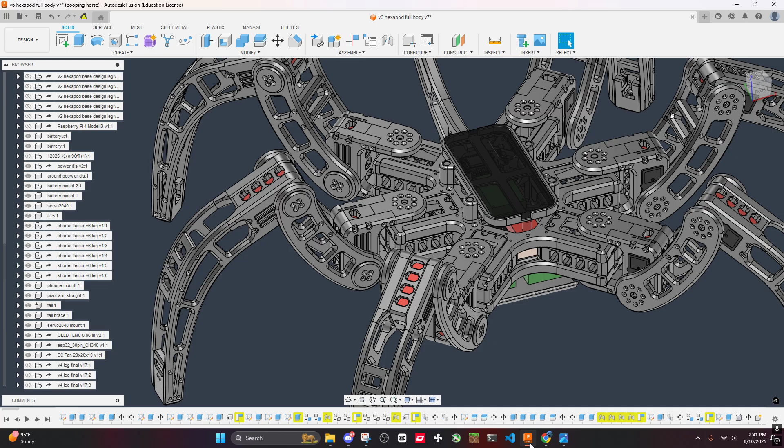So now I can get the pose and I can set the pose as a list of doubles, which means instead of putting this in here, I can make nodes that do things and then send them to Crab, and the Crab will follow that animation. And then I just snap in the one that I want. Or like I said, do the blending mode. Now that I have set pose, I can set pose and build, just give this 18 numbers right here, and it will snap the whole Crab.

The other way is to hard code the motion of each joint, doing this kind of thing. Mhm. But let's see here. For example, let's give this a shot. Standing radius. I don't have it open. You can go away, and you can go away. I need the distance. What radius do you want for the feet when they touch the floor when they go to stand up? What radius? What do you mean?

Okay, I'll try this another way. Like from the center of the body? Add my crab, and let's say that when it stands up, this is where the toes touch the ground. They just got to touch the floor right here. Okay. So what is the distance from here to here? Oh, I see. As if both circles are centered at the origin of the robot. Okay, so from the center, how far are the feet out?

From here to here is the coxa distance, and from this to this toe is what we want to know. Right. Okay. But I have this as a pose, and I have this as a pose, so I can do that mathematically. Yeah, you could just measure the distance somehow, the first time it happens.

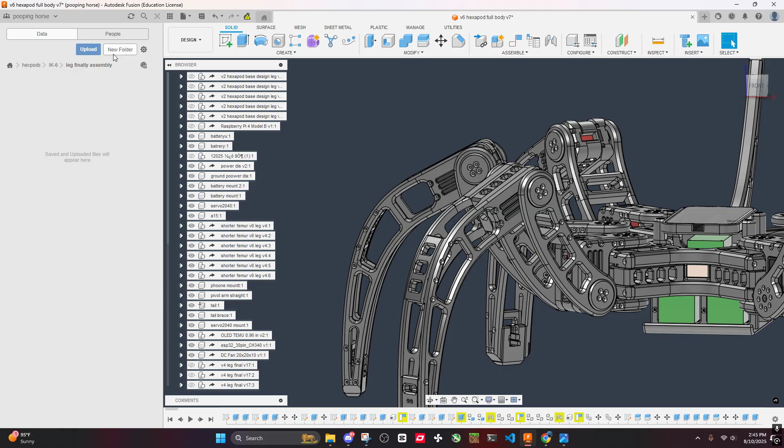So, I definitely need to work on a final assembly of the leg. Leg final assembly will create a new body, new design. We are going to save this as leg final design. He said it's not good to do a final design because it's better to number them, which is good advice. Leg, let's do V7, right? Because we're on V6 now.

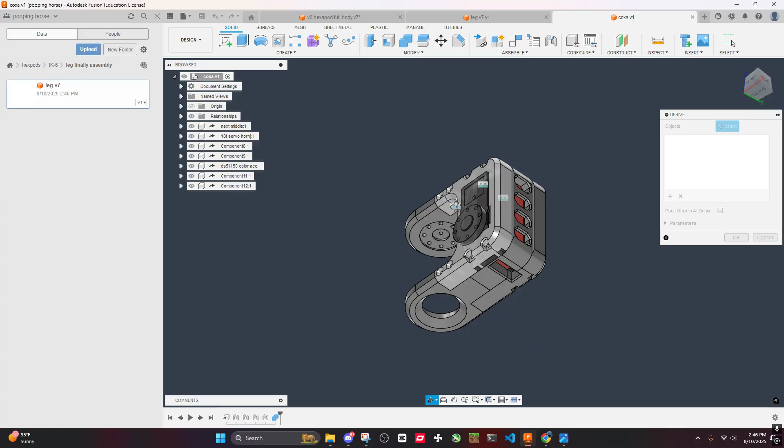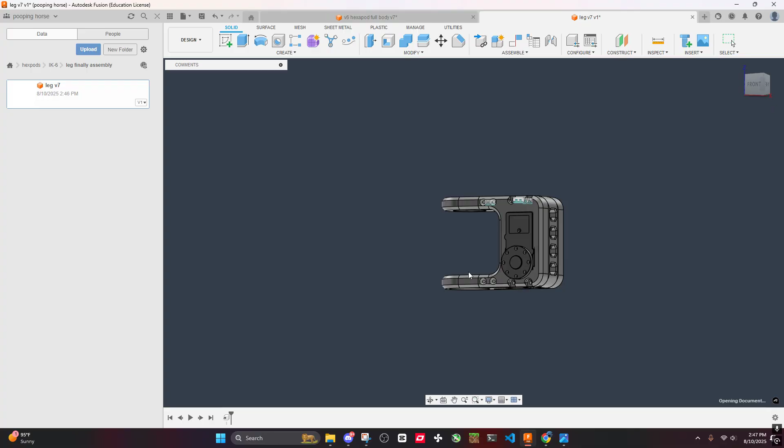We're on V7. We can do insert. Let's see. Inverse kinematics. Simulation. Okay, let's see. How do we want to do this? The coxa. And then we can do insert V4 leg final. We can just import the tibia, I believe. Can we do that? We should be able to.

If I click everything here, it's back. Okay. So I have to think a second. I've done this before, and I wonder if I have old code for this. I do. Sit down, stand up.

Put foot down would get the last point of contact on the floor, and then get the target position based on that initial starting spot. So it would set the end effector target position, and then the leg system is what would actually calculate, move all the bone parts.

Oh, so that's like inverse kinematics, right? Right. I had a separate inverse kinematic controller, and this thing is just saying move the toe to this point, and then the toe, P2, is following this path over time. Are you trying to find those equations that's able to do that? Put foot down snaps the toe to the floor, and then that sends the joint angles through to the crab.

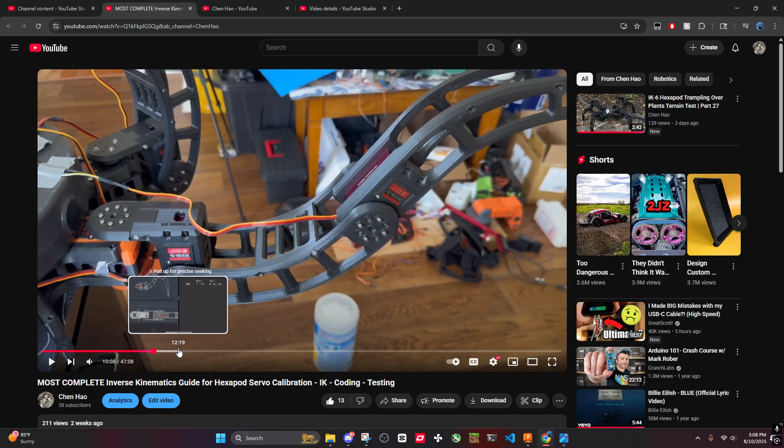Okay. If you, this is the zero. Okay, so for the coxa, I set the straight, it being straight out, just being 90 degrees. So it has 90 degrees to the left and 90 degrees to the right for the coxa. And I sent you the femur and tibia. What? I mean, I see the picture you shared, and I see the code. I'm not following the rest just yet.

Okay, do you see the tibia? If you take the tibia and make it straight with the body, like I think that's how it is right now. Wait, no, it's not. If you make it straight with the body, that's how I have the 0 degree for my servo. Okay. That's that. I can't do anything with that information at this time. Okay. So I do think that's useful. It's too soon for me.

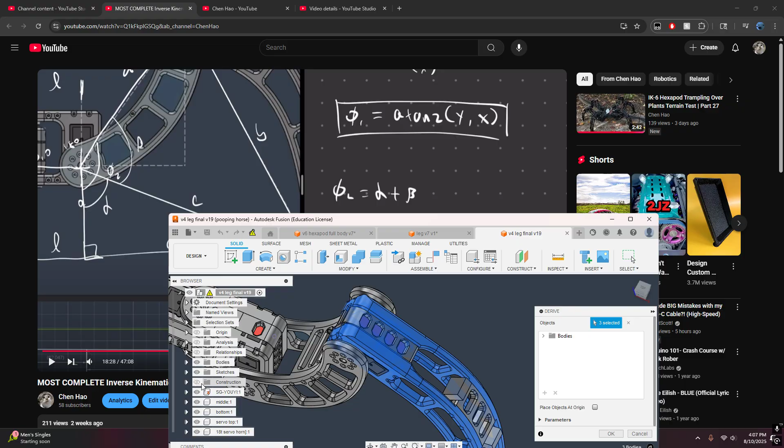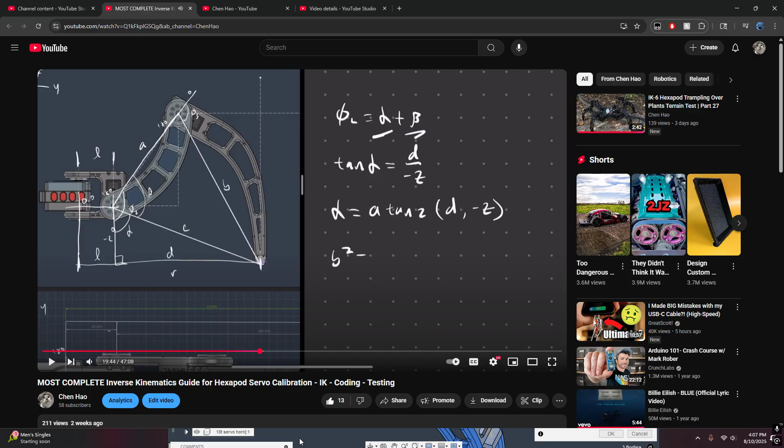So I'm just talking about from the hip joint to the toe tip. But make sure it's the horizontal distance. Yes, horizontal, and then R is the total distance. Linear distance. Yeah, the horizontal distance from the coxa to the tip of the foot. You subtract the coxa, so you're compensating for it. Wait, I have a drawing here. This is to crab center, and this is the radius of the interior.

What is the cursive L in the bottom left? That's the coxa offset or the coxa length. But the coxa length isn't the same for all six legs because the body isn't a circle. It's different for each leg. I have my origin set at these. You see my origin? It's the leftmost. I put a 0, 0 right next to the origin. Yes, I see that. That's fine.

So this is the horizontal distance from the toe tip to the axis of the coxa. It would be the femur? It would be the axis of the femur motor, right? In my drawing, that's how I had it. Femur's the red thing on the left, coxa's the bit in the middle. No, coxa is the red thing on the left. So it's coxa, femur, tibia. The coxa motor is attached to the body and it rotates.

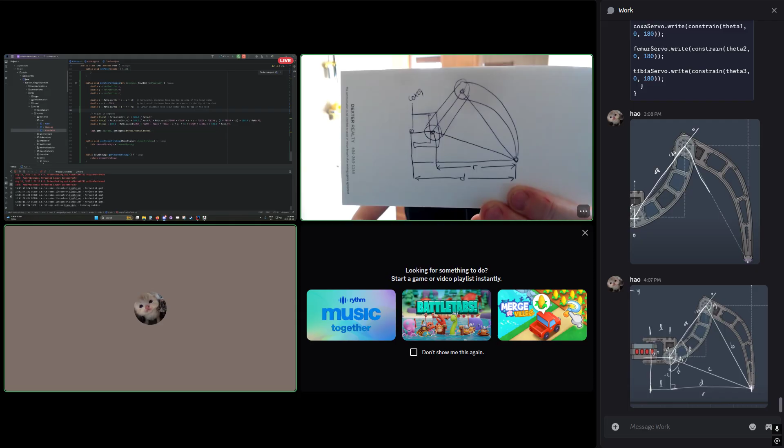Like yay. Let me see. Yes, yes, yes. Take a screenshot. One second. F12. Okay, I got it. Cool. So just D and R switched. That's it.

Right. Now, what are you calling the line from the right angle? You got edge C and you got edge R. What's the third side of the triangle called? It looks like it says C minus R. Oh, that's a negative Z, because Z is up and this is down, so that'd be negative Z. No, we're not putting negatives in here yet. We're just putting labels. That's C. That's a right angle. That's length B.

Wait, I think your stream is frozen, maybe? I'm not doing anything there. Oh, okay. I'm writing on a notepad in front of me. Old school style. This is A. Okay.

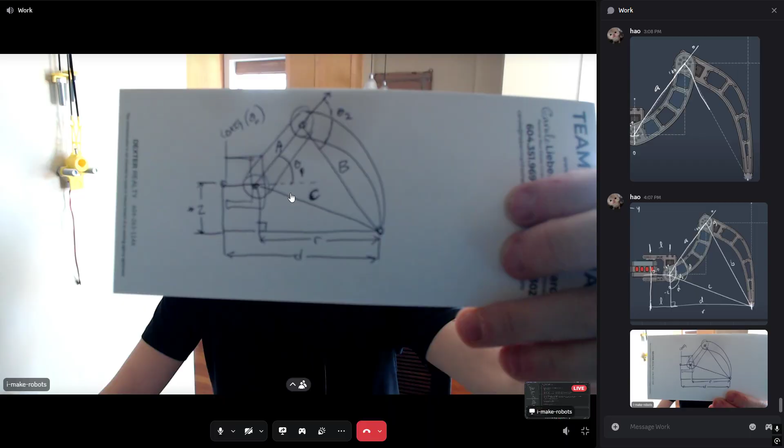The angle at the shoulder. This is the angle that we want. Theta. Theta zero. No, it's theta one because theta zero is coxa. And this angle, this is theta 2. So, like this. Let me see. Okay, Z, C, B. Wait a second, I'll just take a picture with my phone. Rotated it. Put it in general. Okay, let me take a look. Sorry, it's rotated.

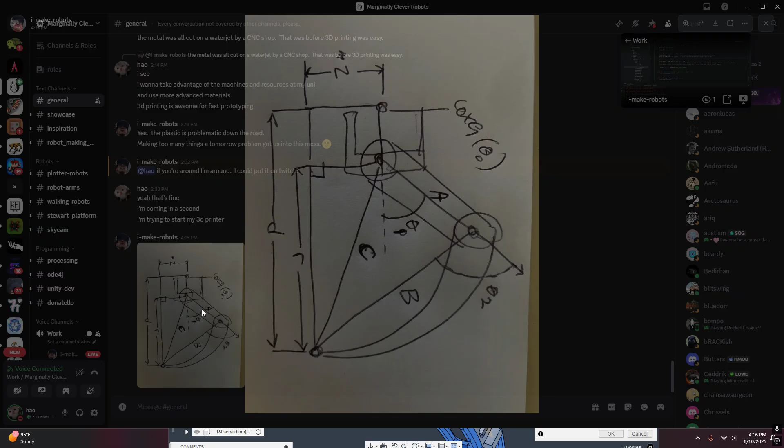Okay, theta. Wait. Coxa, you're calling that theta 0 and then theta 1 and theta 2, right? Yeah. Theta 1 doesn't look right. Oh yeah, theta 1's wrong, because you have your zero angle pointing straight down and you're going from the horizontal, I think. Yeah, you're right. Oh, it was so close. Try that again. A, B, C, theta 2, theta 1.

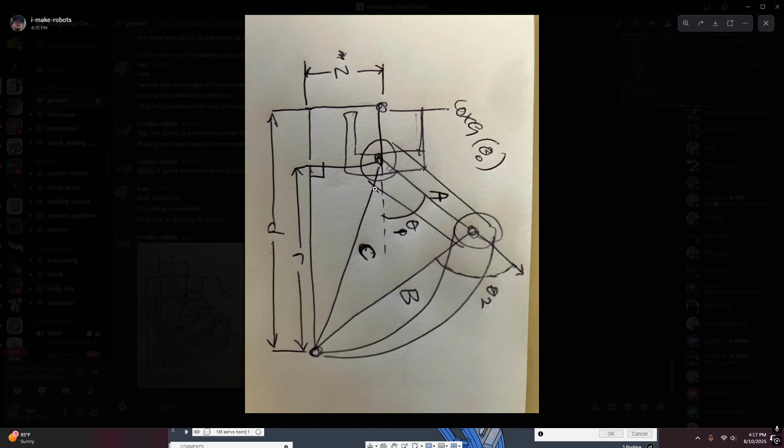Uh-huh. And to calculate theta 1, the femur joint, I had to add together two other angles that I calculated from trigonometry, which I called alpha 1 and beta, because there's not a direct way you can just compute theta 1 with a femur angle. Okay. Edit this picture to rotate it the correct direction. Done. And send it. Coxa body, coxa theta 0. Okay, so femur, yes. Yeah, I think it looks right.

I'm giving it a toe in world space, and I can give it the position of the coxa. So you're given coxa world and toe world, all in world space. Okay. And you need to find thetas 1, 2, and 3. You don't have to find theta 0. You just have to find theta 1 and 2, because we're treating it as though it's on a plane. It's all on one flat surface.

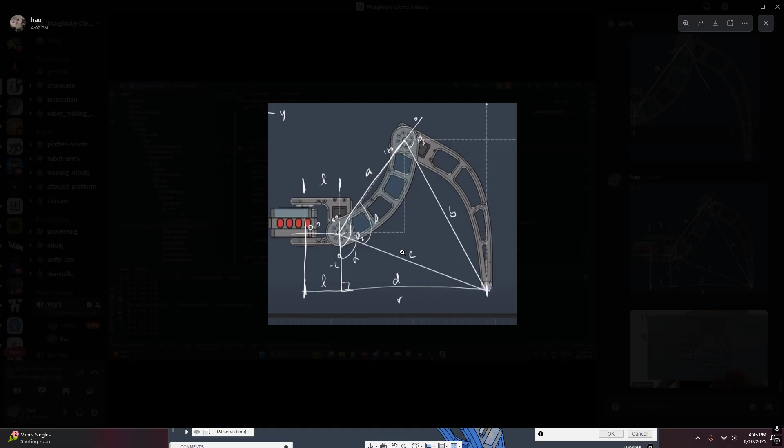This value, when we're saying move toe for one leg, is where we want the toe to be. But that's relative to what? Yes, what you said is right. The origin is relative to the coxa rotation center. But it's not the center, it's the rotation of the coxa in line with the femur. Like I drew my origin on the thing I sent you, on the plane of the femur. Yes.

The hand drawing that I've sent you twice now is on the plane of the femur. Correct. And the XY plane is looking down on the crab. And so in this starting part, you're getting that D value, and then you're doing an atan2 to get you that theta zero. That's for the coxa. Yes, yes.

Angles in degrees? Oh, right, because it's math. Every one of these can be turned into degrees, which is a little more human readable. Yeah, in Arduino, I just had to put 180 divided by pi. Can't I just add these together and then convert it to degrees like that?